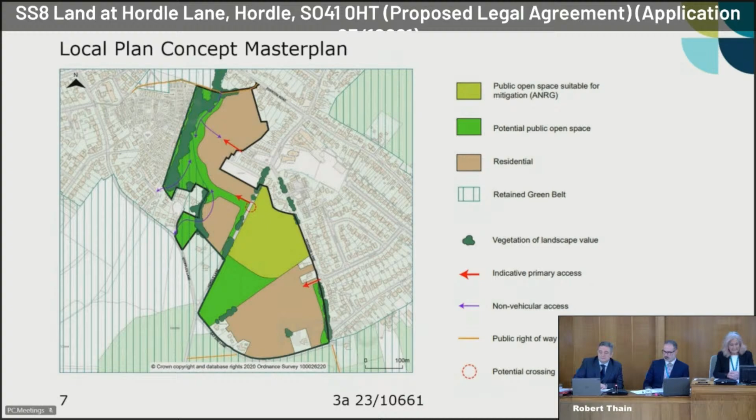The proposal is a hybrid application for the following: an outline planning application for development on land to the west of Hordle Lane, up to 155 dwellings, Class C3 use, including affordable housing, public open space and associated landscaping, surface water drainage and infrastructure works, with all matters reserved except for the vehicular access into Hordle Lane. The proposed housing comprises 60% market dwellings, so up to 93 dwellings, and up to 40%, up to 62 affordable dwellings.

There is also a full application on the land to the east of Hordle Lane for public open space comprising alternative natural recreational green space, pedestrian and vehicular access, allotments, surface water drainage and car parking.

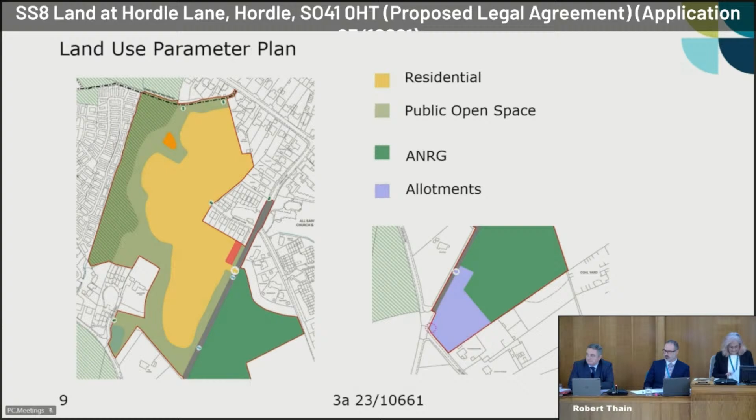The application is supported by three parameter plans, arguably the key one being the land use parameter plan. The proposed residential development within this scheme, up to 155 units, would be located entirely to the west of Hordle Lane in line with this parameter plan. This is broadly in accordance with the concept master plan, which sought to locate housing in this area.

The existing vegetation to the west of the housing would be retained and formed as part of the proposed public open space offer. To the east of Hordle Lane, you have the proposed ANRG, which supports the development, comprising 3.26 hectares of publicly accessible open space. To the south of that would be an area of allotments as indicated by the purple shaded area.

You also note in the land use parameter plan the main points of access, the yellow arrow on Hordle Lane, and the pedestrian crossings, of which there are two on Hordle Lane: one closely sited to the vehicular access, and another closely sited to the south at the edge of the housing scheme. There are also accesses indicated from Sydney Street, to the southwest of the application site off Stopples Lane.

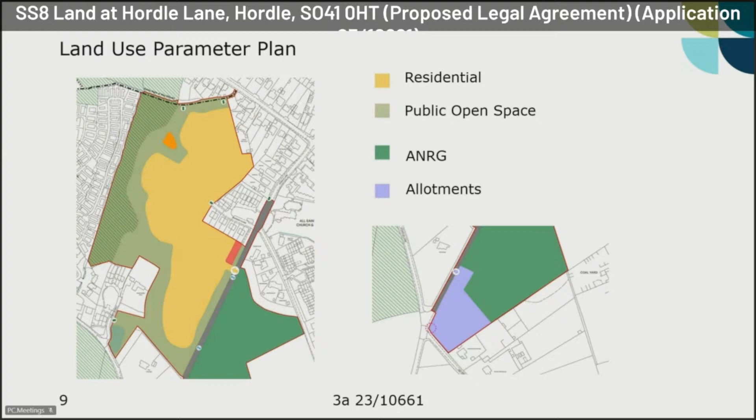Moving on to the green infrastructure parameter plan, this sets out the extent of open space and vegetation within the site, which is extensive. The public open space, informal open space adjacent to the housing, includes play areas, drainage features, pedestrian and cycle links including down to Sydney Street, landscaping, and retained vegetation. The majority of vegetation is proposed to be retained and managed over the long term.

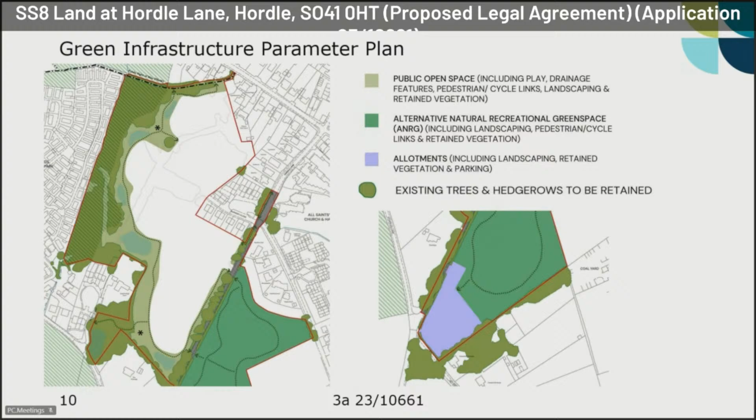On the eastern side of Hordle Lane, we have the alternative natural recreational green space, ANRG, which will include landscaping, pedestrian access, and retained vegetation. I'll come back to that later. There are also allotments to the south of the ANRG.

The third parameter plan is the building heights parameter plan, which subdivides the proposed building housing area into two. The periphery of that area would be up to two-storey development, and the centre of the site would be up to 2.5-storey development, up to 11 metres ridgeline height. Officers are minded, as set out in the committee report, that this is in line with the specific criteria within the spatial policy for SS8, which sought some higher density development within the centre of this building parcel.

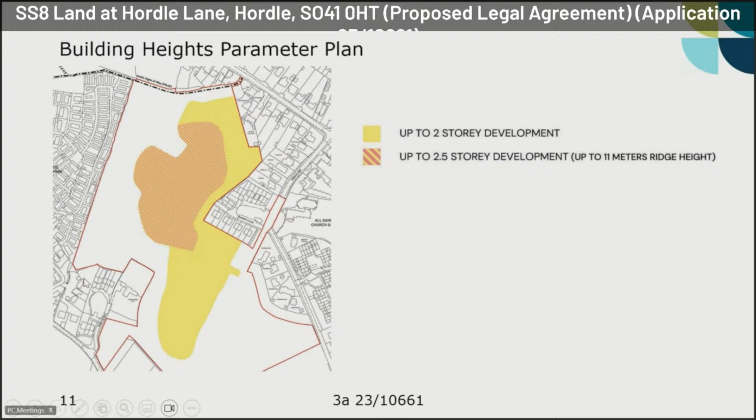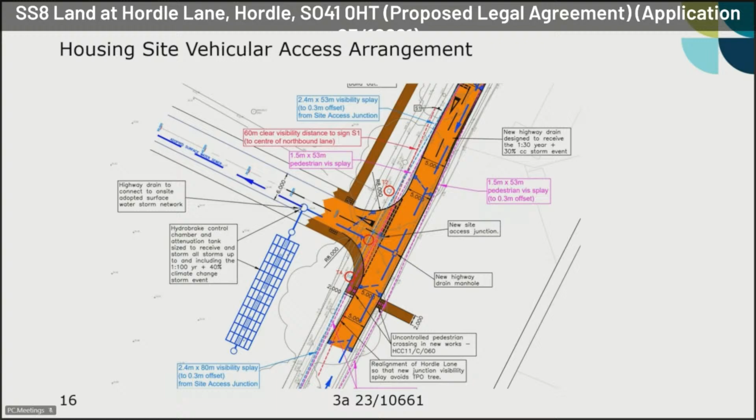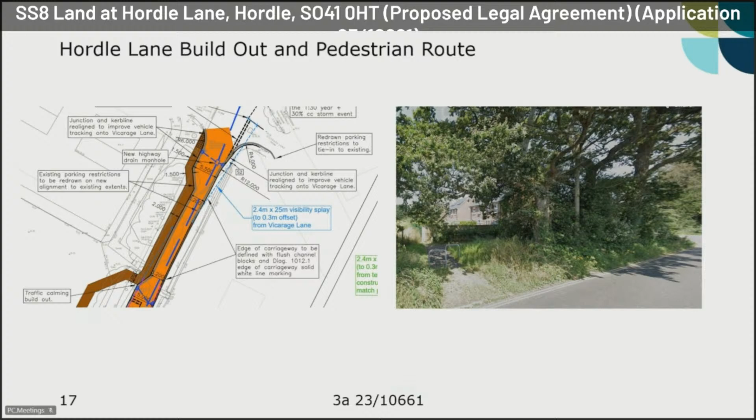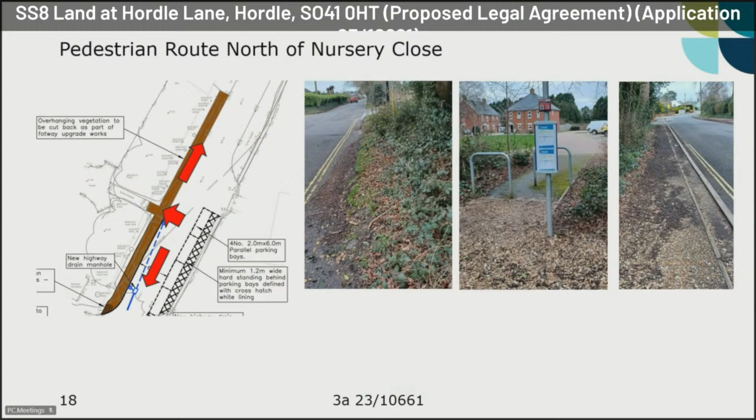The intention is to provide an upgrade to the pedestrian routes, and that would include improvements in surfacing, away from what at the moment partly comprises loose gravel, as can be seen.

As part of the need for highway safety, we have a need to regularise the parking outside the parish church, and the solution agreed with the applicants and County Highways is to form four parallel spaces, as set out in the diagram on the left-hand side. There will be four 2 by 6 metre parallel parking bays, and also a 1.2 metre wide hard standing behind the bays to facilitate safe access into any parked vehicles.

At the moment, the parking outside the church is not formalised, and there would be a reduction of about three spaces generally, where in that particular instance the car was parked parallel in line with the suggested solution, but sometimes people park face-on towards the hedging.

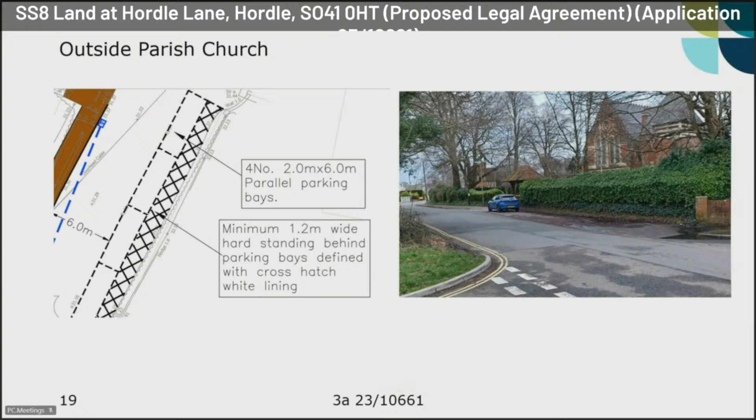The last part of the highways element is to indicate the public right of way north of the site. This is an existing public right of way which this scheme would connect into, providing a link from Everton Road through to the western portion of Hordle, including where the village shops are. There is a small contribution sought towards the upgrade of that public right of way. The area between the application site and Everton Road is currently unmade loose gravel, so it will seek to improve that with a proper tarmac surface as per the rest of that route.

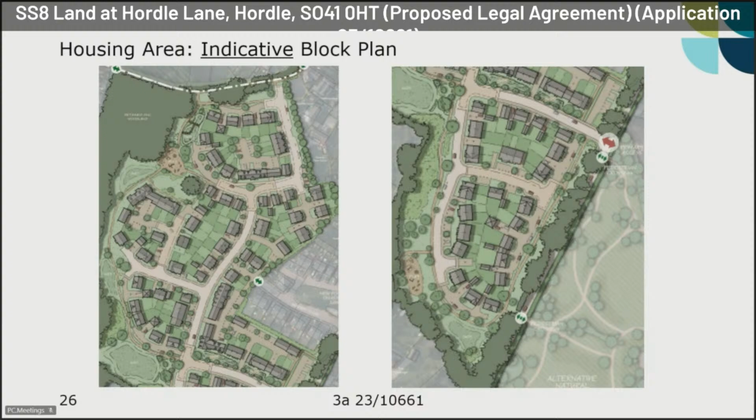Going back to the ANRG, I think it's fair to say that the land the ANRG is sited upon has some advantages. It's flat and it's open, it's got good surveillance, and having worked with officers both in the development management team and the environmental design team, we think this is a good ANRG in terms of open spaces. It provides necessary space for dog walkers, good areas for youngsters to play, and suitable walks for those without children or dogs.

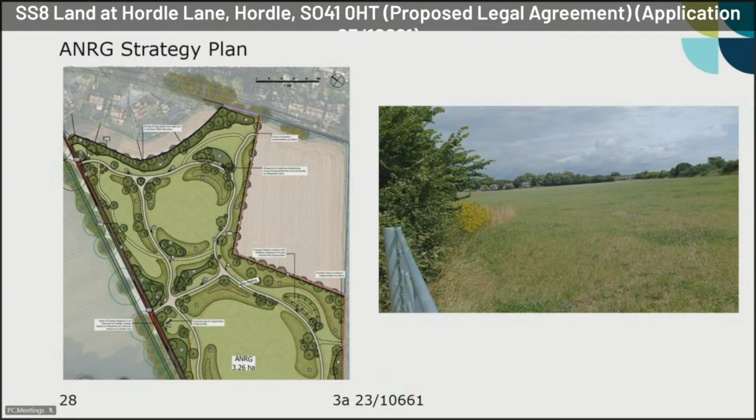Now, to the south of the ANRG we have an area of allotments with 15 different plots. 10 of those plots replace an area of land indicated for allotments which is included within the application site south of Nursery Close, and there are 5 additional plots on top of that. There's also a small area of parking proposed for allotment users, which would comprise a new vehicular access off of Hordle Lane.

The photograph on the right shows the existing 5-bar gate there. We'll be working with the applicants through the conditions to remove the 5-bar gate and improve that through the introduction of new hedgerows, and hopefully this will minimise any visual intrusion of the infrastructure associated with the allotments at that point.

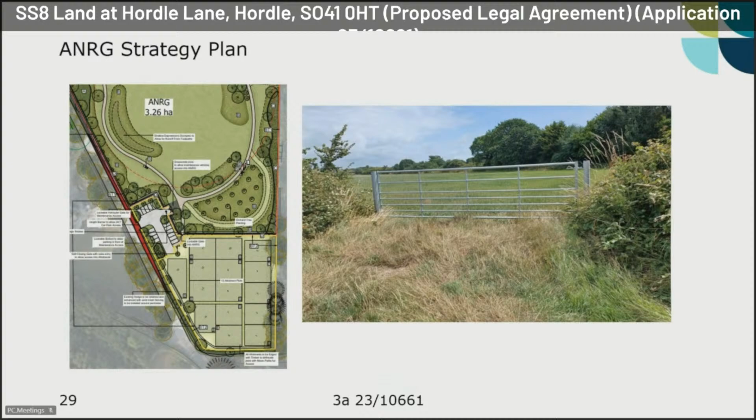Moving on to flood risk and surface water drainage, we've agreed with Hampshire County Council colleagues as the lead local flood authority a surface water drainage strategy within the housing area on the left. That will comprise a series of swales and basins that will eventually drain into the existing stream that goes through the middle of the protected woodland to the west, in the area between this housing site and the Park Home area.

And then on the right-hand side, we've got a surface water drainage scheme for the allotments area as well, and that will drain into the basins within the ANRG. We felt that was necessary as the land the allotments are sited on has had some examples of ponding and can be damp, so it will need its own drainage scheme as well.

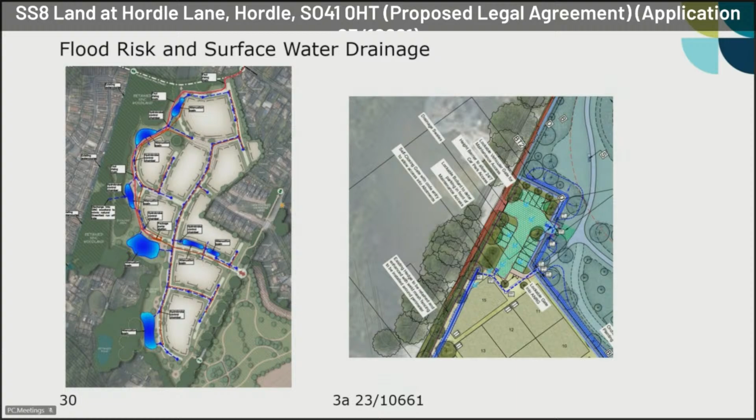Okay, so in summary, the proposal would provide 97% of the minimum quantum of housing identified in local plan policy SS8. That minimum quantum is 160, and we have up to 155 on the table here. Therefore, the proposal would make a significant contribution to the district's housing need.

The development will deliver up to 62 affordable dwellings, depending on the final total number to be determined through a reserved matters application, across a range of tenures - social rent, affordable rent, and shared ownership. So the affordable housing offer that the applicants are proposing is in line with our affordable housing policy and the tenure split set out within that.

Given the proposed housing, the balance is clearly in favour of permission and will meet the priority of meeting housing needs set out in the recently adopted NFDC corporate plan. No substantive alternative evidence has been submitted in representation to set aside the views of statutory consultees.

The proposal, subject to a Section 106 planning obligation and suitable conditions, will be acceptable in terms of highways, access, public right-of-way, flood risk, surface water drainage, and foul drainage. The representations from the Parish Council and local communities on highways are fully noted, but in line with the representations from the local highway authority, subject to a Section 106 planning obligation and suitable conditions, the proposal is suitably mitigated for development.

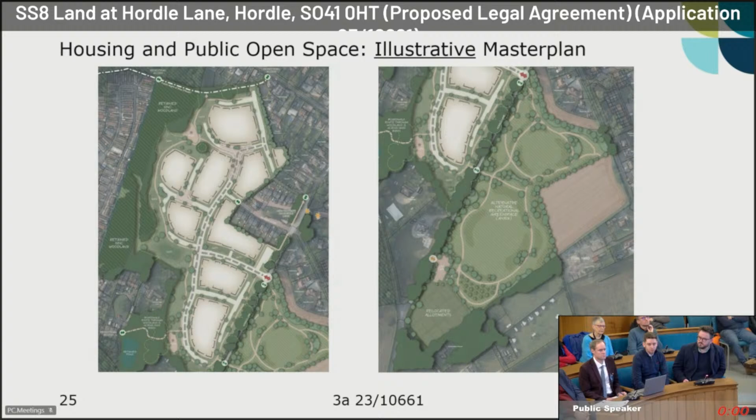Yes, we've had discussion on that with New Forest and Hampshire. I think there's obviously an element of, yes, whilst it might open it up to the wider population, there's also an element of putting pedestrians onto an uncontrolled road, and the issues around everything discussed now about people walking along Hordle Lane. So in discussion with those officers, it was deemed that it wasn't something we wanted to provide within the application because of those reasons.

I think, as Robert's outlined, there is a lot of connectivity to the site and the scheme, and with the future area of ANRG, there's potentially an opportunity to review it at that stage. But within this application, it was just determined to present it as shown.

So you're saying that's something that might well be reviewed at a later stage? Yeah, I mean us as Bargate wouldn't be involved in any future application because we don't control the other housing elements to the south, but there are contracts we're involved in. That's where, should it become future ANRG, we essentially hand that land over, and it'd be for those applicants to decide on access, with an opportunity to review that. But as part of this scheme, we're not looking to provide it.

But as Robert noted, there are two future connections, one into that portion of retained land, and also one on the eastern boundary, so that future residents can access that when that future application comes in. Thank you.

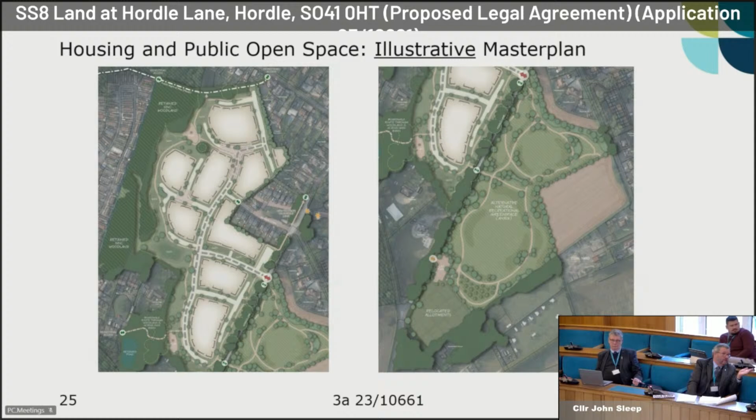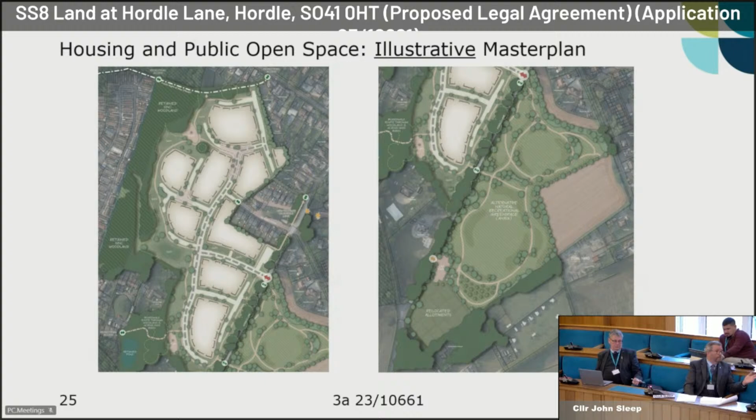One of your statements was that the parish comments have been fully noted. I notice we've got highways here, which is rare for us, because on these plans we always have problems with access roads, small streets, little lanes. It's always a nightmare, but highways tell us it's okay, they've checked it, so we pass it because we have to take their word for it. We've got strong support from the parish on this. I want reassurance that all the concerns they've brought forward have been fully noted, and if not, will they be developed further in the next section of planning for the housing?

Both myself and Mark and everybody in his team are always happy to meet the parishes if they approach us. I don't believe that's specifically happened in this application, although I've had various conversations with the parish clerk, who isn't here today, and the last conversation I had was for over an hour before Christmas. In terms of noting the parish comments specifically on highways, these have been acknowledged by my colleagues from County Highways and taken into account in their professional opinion, which has been set out.

Are there any more questions? Councillor Riley: it says here the parish council will only accept the management of the allotments if they were transferred to the parish in perpetuity. Is that a possibility, or could that happen?

The current intention is to open up a dialogue after this committee with the parish to see if they wish to take on in perpetuity stewardship of those allotments. That ball is in their court as to whether or not they wish to do it. If those allotments weren't taken on by the parish, they would be incorporated within the management company, which will manage the other open spaces within the whole application site—for example, the ANRG to the north, and the other public open space. They'll be subject to a management company regime, as we've done on most of the other strategic site allocations. But we'll happily discuss that with the parish to see if they wish to take it on or not. Essentially it's their choice, but the offer's there if they want it.

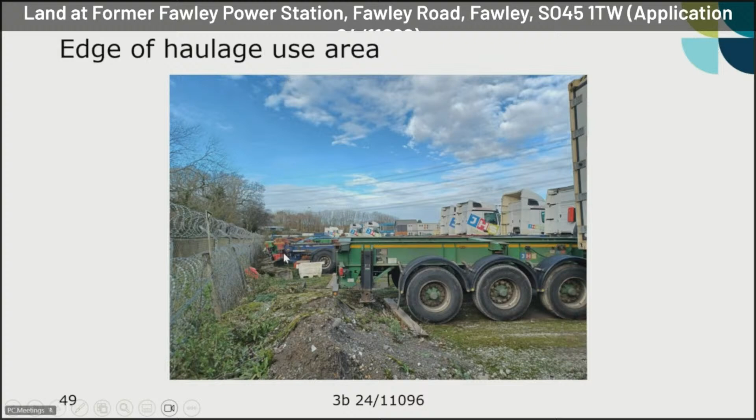Then this next photograph is showing the central haulage use area occupied by JHS. You'll note their vehicles here parked and stored on the land. And then here we have a photo of the western edge of the haulage use area. You can see the wire fence boundary here with woodland beyond. Then here we've got another image of the haulage use area, looking southwards. In the distance, you can see the electricity substation building and some stored wind turbine blades as well there.

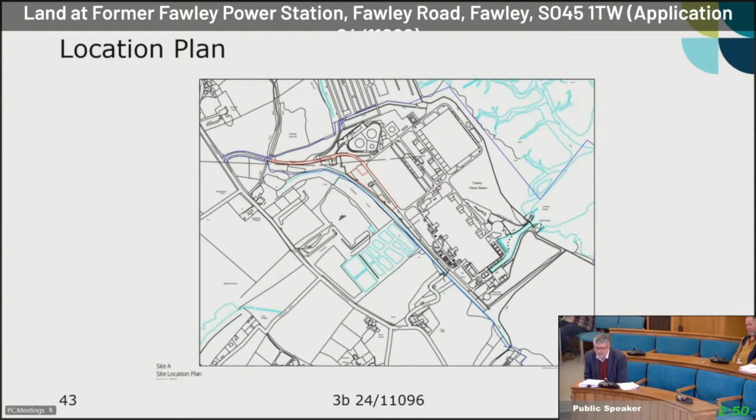Thank you for the opportunity to speak. My name is Ian Monachino Ayres. I'm a director of IMA Transport Planning, speaking on behalf of the applicant. We prepared this transport statement that was submitted in support of both the temporary applications, sites A and B.

The approach to assessing the impact of the proposal was slightly unusual in that the applications are retrospective, and hence the site is already being used for the planning permission sought. This means our approach was to survey traffic movements both on the site access and on the B3053 to the north of the site access to establish how much traffic the whole site was generating and its proportion of traffic on the B3053. We then, based on the development areas, estimated how much of this traffic was due to the areas for which planning permission was sought, which allows us to assess the impact of the proposed development areas on the highway network. The conclusion of our assessment was that the impact of the use of the areas for which permission is sought is negligible and would have no material effect on the operation of the highway network.

Hampshire County Council, as highway authority, has considered our assessment and concluded there is no highway objection to the proposed development. I've also been asked by my client to address the recent representations made by Mr. Allen, a local resident, regarding the logging of movements by container vehicles over the weekend. They would like to advise the committee as follows.

Regarding the current hours of operation undertaken by JHS, we fully acknowledge that these are incompatible with the proposed hours of use condition. If planning permission is granted, JHS would therefore be unable to continue operating in their current manner from the site. In reality, this means they would probably end up having to vacate the site. There are breaks in the lease agreement with JHS which would allow us to terminate the lease in such circumstances.

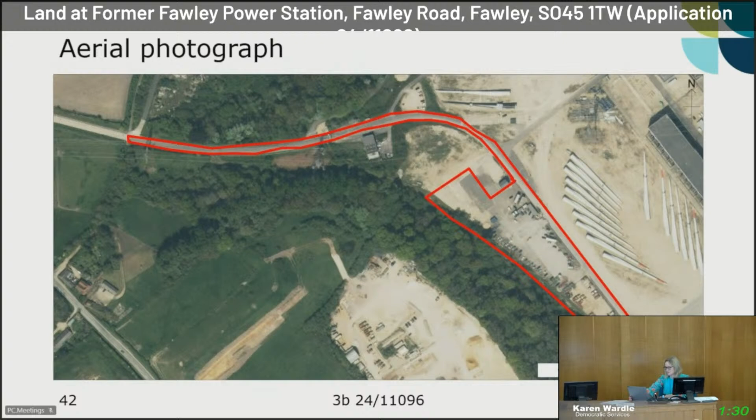The major problem for residents is the increased noise from traffic, particularly on the B3053. It is accepted by both the planning officer and the environmental health officer that this noise negatively impacts the community. The various traffic reports are difficult to compare, but another issue is the increase in traffic since 2019, which the road movements planned under the original scheme and agreed with Hampshire County Council were meant to address.

If these two applications are accepted with the condition that the work can continue until the end of this year, it will mean these unapproved activities will have continued for well over 2 years. I think this is unacceptable, and I believe it is a mockery of due process and the rights of the community not to be negatively impacted, which are enshrined in planning law. I ask this committee to take action to stop the use of the site for these purposes as soon as possible.

Thank you. We did have a declaration of interest. Was it Councillor Hartman? Yeah, if that's recorded. Thank you.

Okay, questions then, please, either to officers or speakers. Councillor Wade. Yes, Chairman, I've got a question for our planning officer.

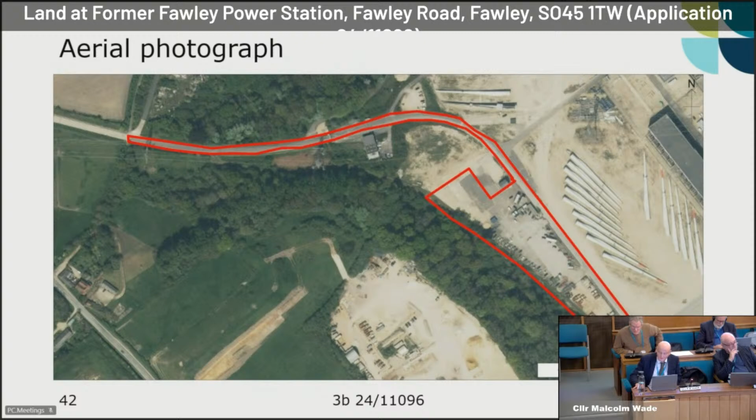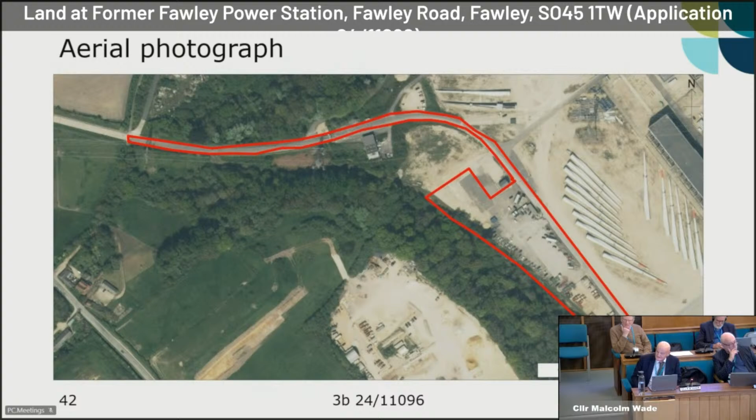A haulage company requires an operating licence legally to exist and to operate. Part of the operating licence has to designate its operating base, it's got to be on their licence, that's a legal requirement. Now this is retrospective planning permission, but to get an operator's licence and an operating centre, you have to have planning permission. So the question I want to ask our officers is, are we about to ratify something that is illegal? Because if you have to have planning permission to have an operating centre, the operating centre has to be on the operator's licence.

This is true, because I've just checked it myself while we were going through this. How can we ratify something that isn't correct legally?

I'm not sure that I can fully answer the points, but what I can tell you, based on the application submissions, is that the agent for the application has confirmed that JHS do have the necessary operator's licence. In terms of the planning consideration, that really isn't something we consider in terms of whether we recommend temporary permission or not. Obviously, if temporary permission is granted, then the uses on that site would be lawful for the duration of the rest of this year, but they would need to operate in accordance with the conditions of the temporary permission.

Can I just come back to that? I understand what you've just said, but if it's illegal in the first place because it hasn't got planning permission, is it right that we're going to ratify something that was originally illegal? Perhaps our legal officer will add.

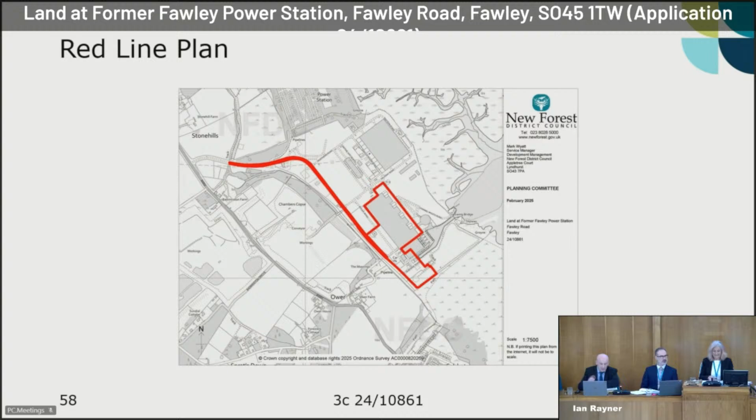The application has been submitted retrospectively, with temporary planning permission being sought until the end of this calendar year. In terms of context, you can see again the site is served by the long access road that comes in from the west, from the B3053. The land in question lies immediately adjacent to the New Forest National Park on its western and southern sides, with there being a public footpath that runs fairly close to the site's southern boundary.

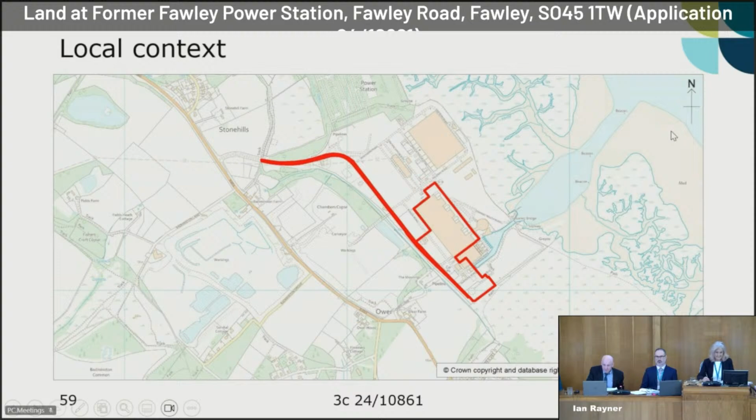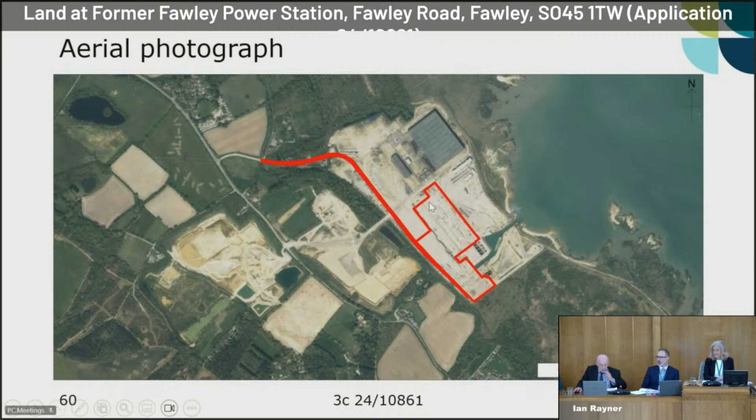This aerial photograph gives you further context. Again, you'll see the long access road coming in. The site itself is laid to hard standing and the ground level areas are flat, but as you will see from the photographs that I'll show you, the large basement of the now demolished turbine hall extends several metres below adjacent ground levels. You can see that the adjacent areas of the former power station site are being used for the storage of wind turbine blades. You'll note again the site's proximity to Southampton water and protected coastal habitats, whilst to the west of the site, you'll note the active quarry workings within the national park.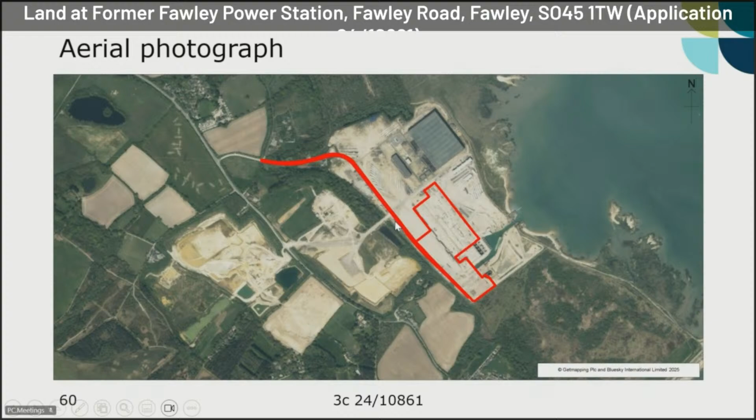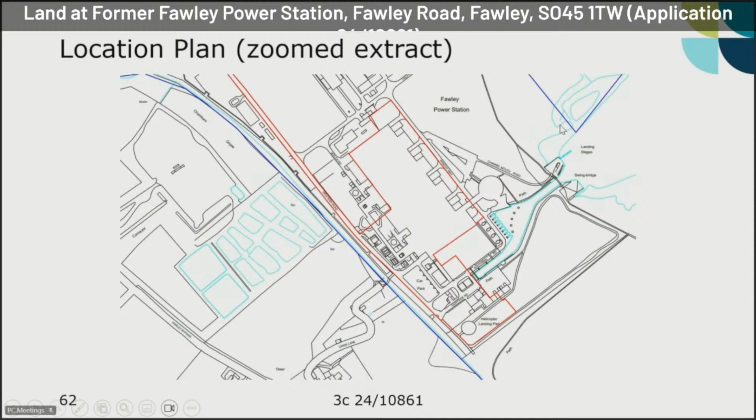I'll just take you quickly through the submitted application plans. This is the site location plan, and then a slightly more zoomed in version of that location plan. Just to note, many of the structures shown on this plan are now demolished. And then this is the applicant's submitted block plan. This area is the basement, the turbine hall basement area.

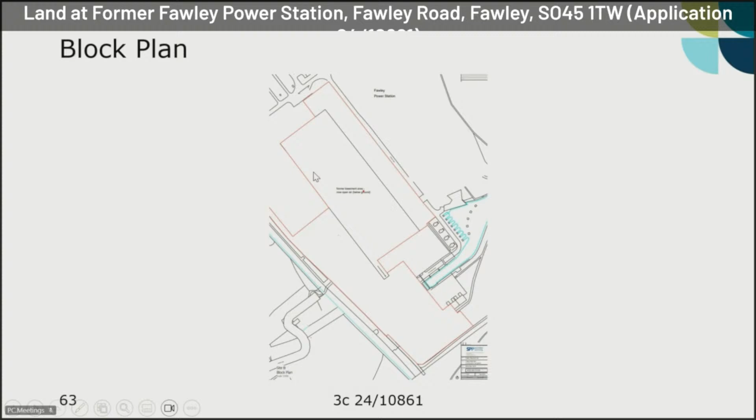Now at present, the site is occupied by two different uses. The main user is SJG, a local company based in Marchwood, who import vans from China. Vans are brought into the site on containers before being stored on the ground level areas of the site until they are sold, at which point they are driven away. Some of the empty containers are then stored in the basement until being sold on. The second user, Snoozebox, have been renting the northwestern corner of the basement area since September 2023, where they store containers used as mobile accommodation units for large construction projects and events. Since the main delivery of their containers to the site, their use of the site has been very low key.

So to show you some photographs so you get a clearer understanding of the site in its context, here we're looking from the south into the old turbine hall basement. You can get an idea of how deep the basement is. You'll note the containers being stored within the basement by SJG, and on the left-hand side of the image you'll note some of the vans being stored on the ground level areas outside of the basement. This image again shows more clearly the vans stored within the ground level areas above the basement, and here you can see the sloping access into the basement from ground level.

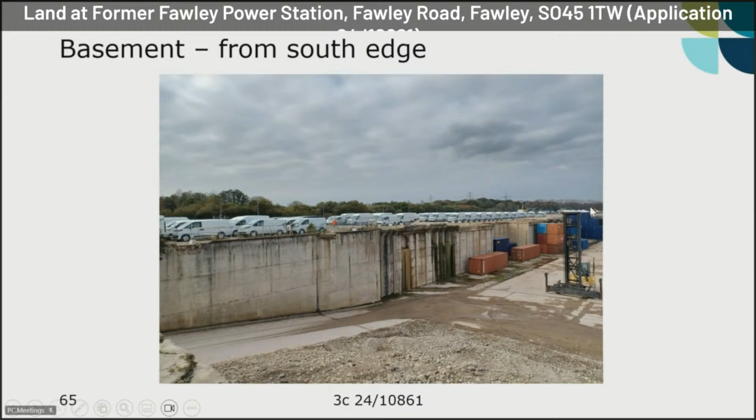Then here we've moved to the north side of the turbine hall basement. We're looking into the basement clearly. You can see here some of the more recently delivered containers which the vans are brought in, typically two vans within each container. Further back you can see the containers being stored, stacked up to 5 containers high, but they only project above the walls of the basement to a limited degree. Again, you'll notice the white van stored above the hall.

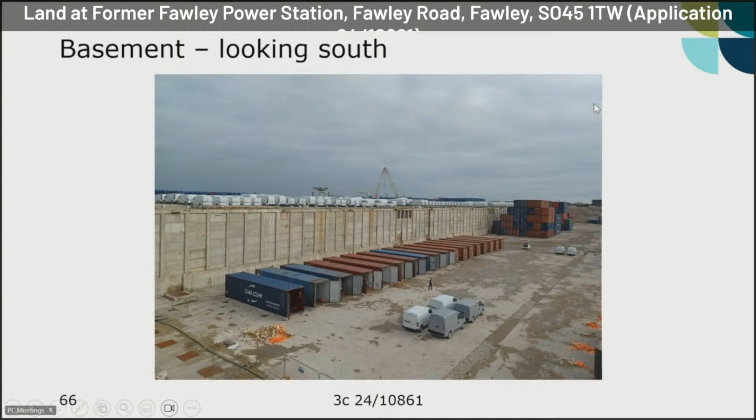Now here we're looking at the storage use by Snoozebox. These are all the double stacked white containers here. The storage here, as I've mentioned, is relatively static. And then here we're looking into the basement from the western side. Again, you can see the white containers stored by Snoozebox, and beyond you can see the different coloured containers being stored by SJG, and again you'll notice the stored vans in the distance.

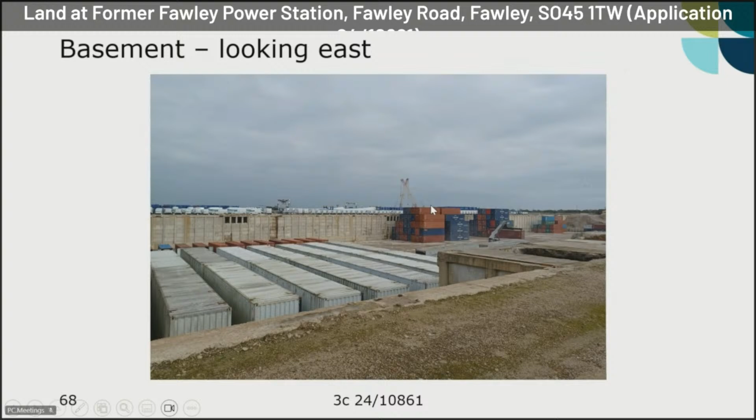So in terms of the ground level areas, just a couple of images here. This is on the east side of the turbine hall basement. Again, you see the line of stored vans. And then here we are down to the southern boundary of the site, adjacent to the National Park boundary. You can see the wire fence here, which marks the power station's boundary, beyond which is the National Park. One final photograph is this aerial perspective, which gives you a clear idea of all the activities at the former power station site. This is the turbine hall basement in the centre, and you can see the lines of parked vans on either side, and some of the other activities including the wind turbine storage.

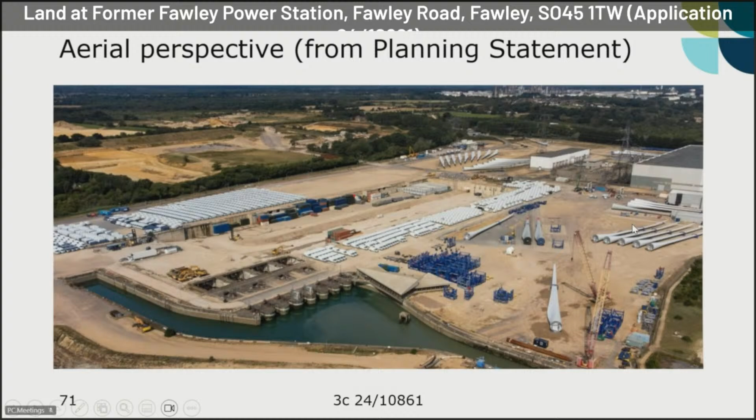As with the previous application, the permanent storage use would not accord with policy strategic site 4 of the local plan. Again, this is the concept master plan, and as I've said in the previous presentation, policy promotes this site for a residential-led mixed-use development of 1,380 houses, up to 10,000 square metres of ancillary community retail, leisure and service uses, and business uses, falling primarily within use classes B1 and B2 in the northern part of the site.

Following the withdrawal of the redevelopment proposals last year, in July, as with the previous proposals, it's considered that a short-term temporary employment use would be appropriate in principle and would deliver economic benefits in the short term, pending more permanent uses coming forward.

As with the previous application, the proposal still needs to be acceptable in itself and in accordance with policy ENV3 of the local plan. In this respect, there are 5 issues I will go through briefly, namely transportation impacts, amenity impacts, landscape impacts, ecological impacts, and in this case, flood risk.

With respect to transport impacts, you've heard the advice on the previous application. Both applications were supported by the same transport statement, which considers how much transport impact the uses generate. Details are set out in the committee report. In respect of this site, the storage use by Snoozebox is a low activity use generating few traffic movements.

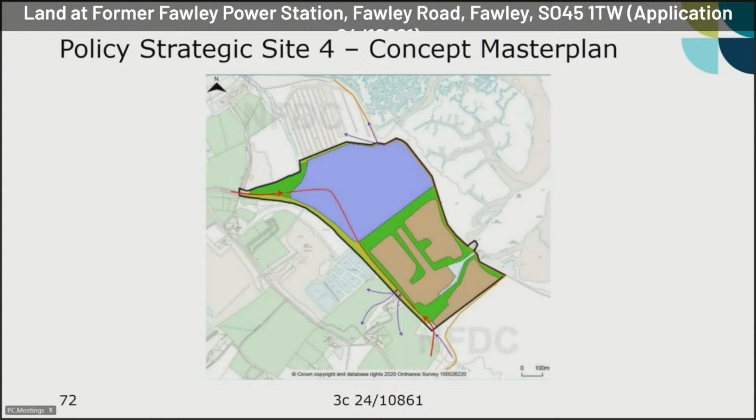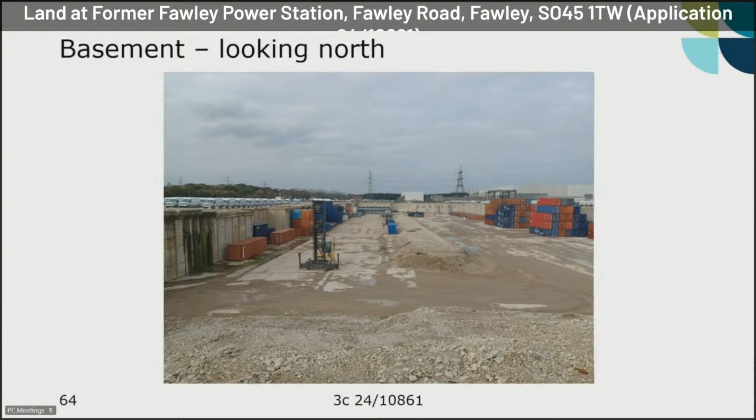Moving on to amenity impacts, the most significant noise impacts in this case are within the turbine hall basement area, which due to its depth is quite an effective noise buffer. It's important to note that SJG only typically operate on the site between 7 a.m. and 5 p.m. Mondays to Fridays and do not operate at weekends. Therefore, their use of the site should not be generating significant traffic movements beyond the site outside of these hours. The applicants have confirmed they're agreeable to accepting a condition that restricts hours of operation to these current working hours, and in this way officers are satisfied that the use would not be materially harmful to the amenities of nearby residential properties in Ower Lane or properties further afield close to the B3053.

In terms of landscape impacts, and in particular impacts on the adjacent New Forest National Park, the parked vans are visible from public viewpoints within the adjacent national park, but in the short term their visual impact and landscape impact is considered acceptable. However, even in the short term, it is recognised that container storage would have the potential to have a more harmful impact on the national park. As such, this plan has been submitted to label the areas where container storage occurs, to be conditioned.

The green area of this plan is the turbine hall basement, where stacked container storage is considered visually acceptable. The yellow area, adjacent to the more open parts of the adjacent national park, is where it is considered that no container storage should occur, whilst on the beige areas, single height container storage is deemed acceptable, and this is reflected in the conditions detailed within the committee report.

In terms of ecological impacts, a concern has been raised about the potential for bats to roost within some of the crevices of the turbine hall basement. On the basis that the application only seeks a short-term temporary planning permission, this impact is considered acceptable, subject to condition 6 as detailed in the committee report.

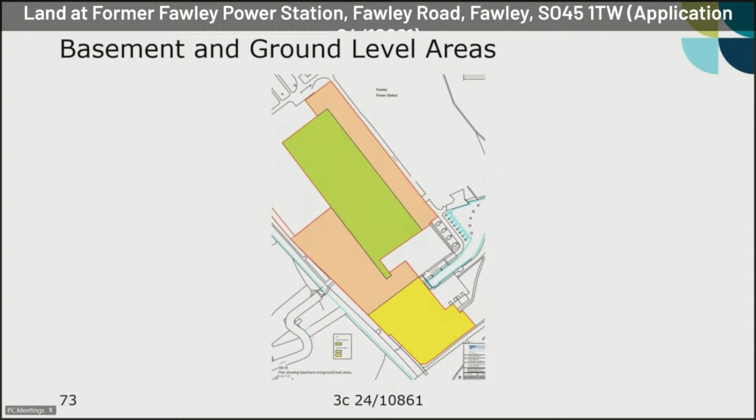Summing up, then, we have a proposal, as with the one you've just considered, that's contrary to local plan policy. However, officers consider that there is reasonable justification to permit the proposed temporary use until the end of this year, given the scheme's short-term economic benefits and given the proposal would not prejudice the long-term delivery of a sustainable and policy-compliant development in the longer term.

Officers are satisfied that the continued operation of the proposed use would not be materially harmful to highway safety, to residential amenities, to the special qualities of the adjacent New Forest National Park, or to ecological interests, or indeed harmful from a flood risk perspective, subject to conditions restricting hours of operation and the height and location of stored items. So the recommendation is to grant temporary planning permission, subject to conditions, until the end of this year.

Thank you. I don't think you need to read, Councillor Alves. You want to do it again? No, and you're happy not to say any more. So, questions - do you still have your question, Councillor Crozell?

Councillor Sleep: In Councillor Alves' defence, one part of his message stated that while we have these vehicles parked on site, there was no reason, according to ABP, why they couldn't have been parked in the docks. There was access available for them. I'd just like to make that point.

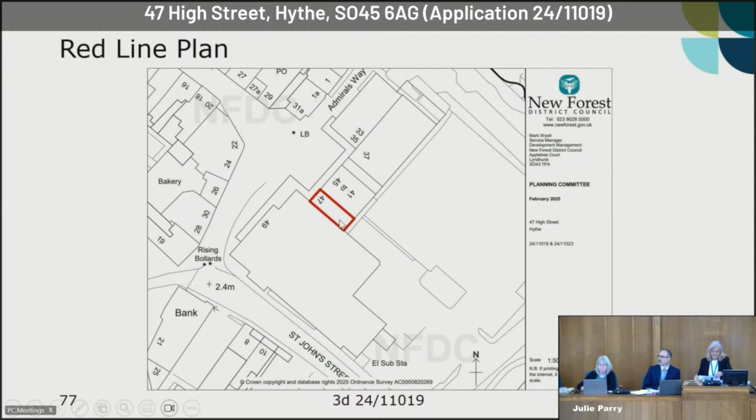Here we have the planning constraints. So all this in pink is the conservation area. It's quite a wide area which covers the High Street, the Marsh and St John's Street.

Highlighted here are some of the listed buildings. We've got number 23, currently used as a chip shop, the public house, another unit opposite, and round the corner into the Marsh, this big unit on the corner is also a listed building. So when considering this, we consider the impact on the conservation area and also the setting of these listed buildings. Local policies and government guidance are looking to preserve and enhance this historic character with any new development.

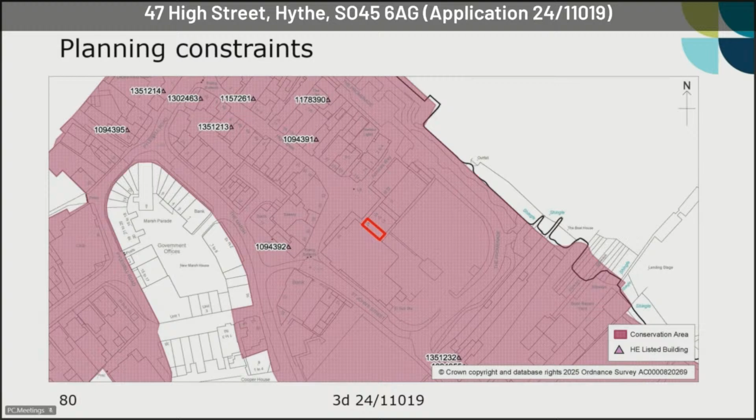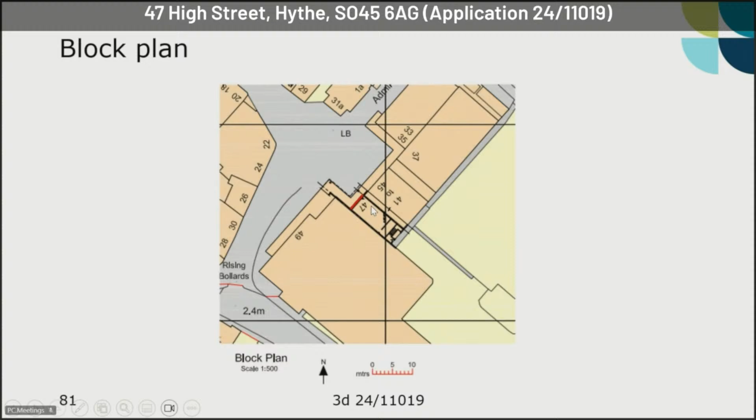So we have a block plan here produced from the agent showing the frontage of the shop highlighted in red, which is where the signage is at this stage. You can see the signage here above the shop, and we've got the shuttering underneath. That isn't considered under this advertisement consent - that would be under the next application. So this application, we're just dealing with the Hythe Barber Shop sign here, which is internally illuminated. It's a metal box sign, and each letter is obviously illuminated individually.

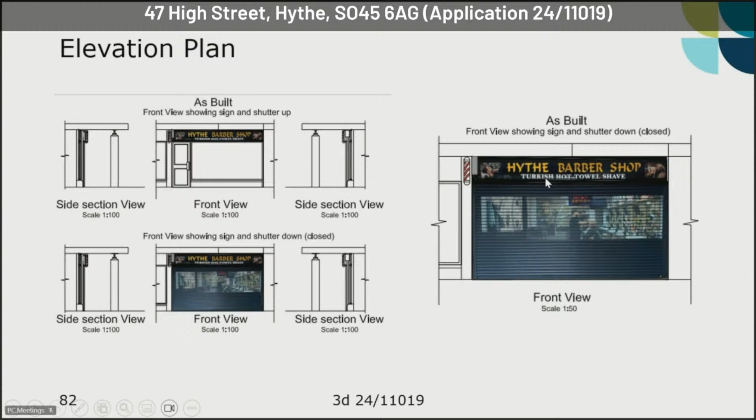And here's the elevation plan showing the protrusion to the front of the security shutters and the sign.

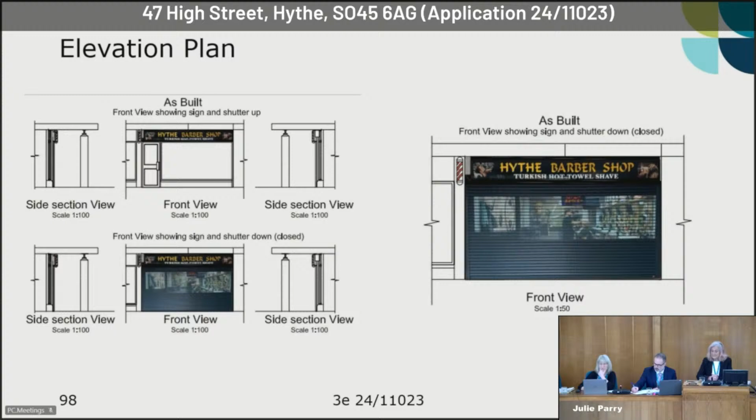So I just want to go through the photographs of the shutters when they're closed. Basically it's a corner position and it does give a semi-industrial appearance, which is out of keeping in this location, these metal shutters in black. It is contrary to the shopfront design guide, which states that gaunt and unattractive shuttering could create a hostile environment if replicated, and it obscures views into the shops, giving a blank frontage, which gives a loss of vitality and traditional character of the area.

So again, the recommendation is to refuse the shuttering because it's unsympathetic to its environment, the street scene, conservation area, etc. as before. Thank you.

Thank you, are there any more questions? Councillor Sleep: Can I just ask the officer, if the elevated box, the 500 deep box on the top, are we looking at the blind actually installed in that as well? Yes. So the box, we get rid of the box, the blind's got to go. Both go really. Okay, thank you.

Councillor Cresswell asked if this means shops can't have shutters even if subject to vandalism. It was explained they would need consent for shutters, and such shutters would reduce the vitality of the conservation area, though internal alterations might not require consent.

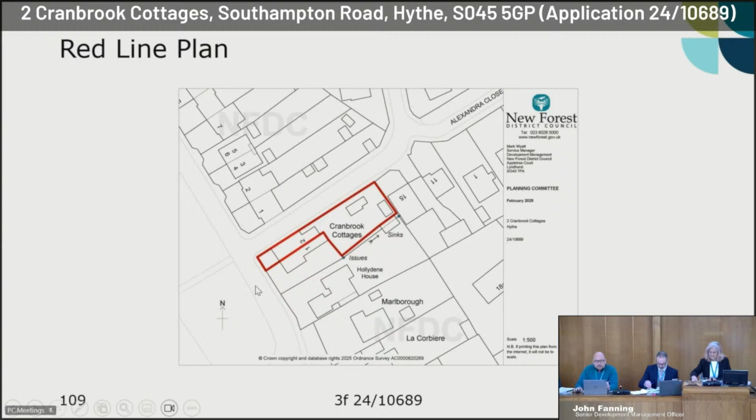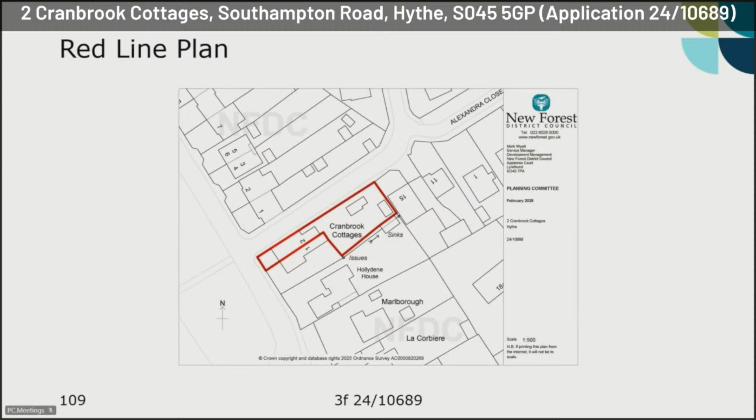The officer presented the application for a new dwelling in the back garden of the existing property at 2 Cranbrook Cottages, wrapping around the rear of the conjoined property at 1 Cranbrook Cottages. The site is off the main Southampton Road thoroughfare, set back by green space, accessed via a road leading into Alexandra Road and Alexandra Close.

The officer noted they wanted to discuss the layout of the area and flag a few points for attention, highlighting that properties here are set back from the building line.

There's also quite a spacious character in terms of sight lines - the fence drops down here, so you've got sights across these rear gardens. We'll look at some site photos later, but there's an existing access here, which provides access to a couple of different outbuildings in this existing open garden area.

While I've got this slide up, I'll talk about one of the key issues on the scheme, which is that there's a culverted river running in proximity to the site, resulting in this strip being designated as flood zone 3. As laid out in the report, flood zone 3 is split into two categories, 3A and 3B. For the reasons outlined in the report, we've taken the position that we're currently designating this site as flood zone 3B, the highest rating of potential flood zone risk.

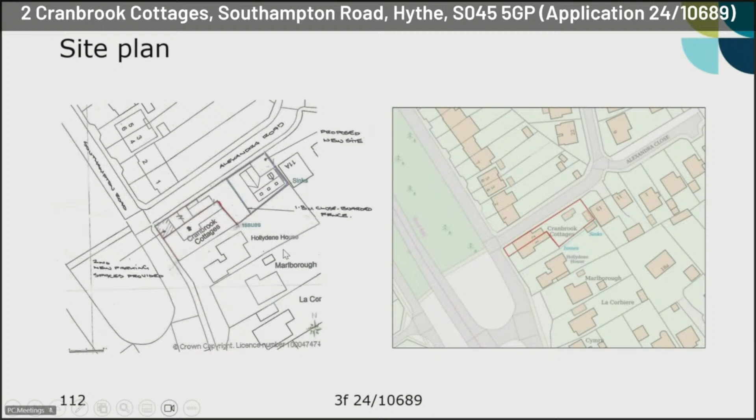So in terms of the actual proposed development, we are looking to fit in a bungalow, a single-storey property, with a garden running to the side of the property. You can see the relationship with the dwelling to the rear there, and then it projects forward to the front of the site. You can see those existing outbuildings here, which we've got site photos of in a few seconds. And this is the proposed layout.

In addition to the potential concern about the flood zones, we also had some concerns about the potential layout of the development and how it integrates with the surrounding character and appearance of the area. As you would have seen from the high-level photos earlier, there was quite a substantial setback characteristic of this area, and also quite large gardens generally. The concern was that the infill development here felt quite cramped in the plot.

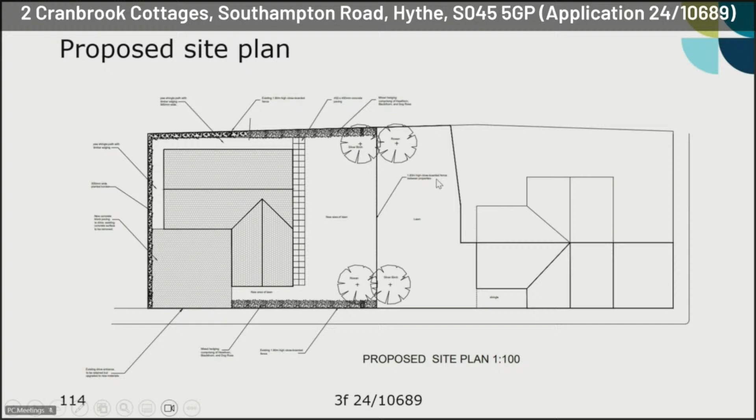We'll look at the elevations in a second and you can see how that would look in the street scene - that's to give you an idea of the layout and subdivision of the existing plot and how that would work. So this is the front of the property, the one on the left, that's what you would see walking down the street scene. This is how the property would look fronting onto the open space area to the side, the garden, and this is how it would look from the other elevations.

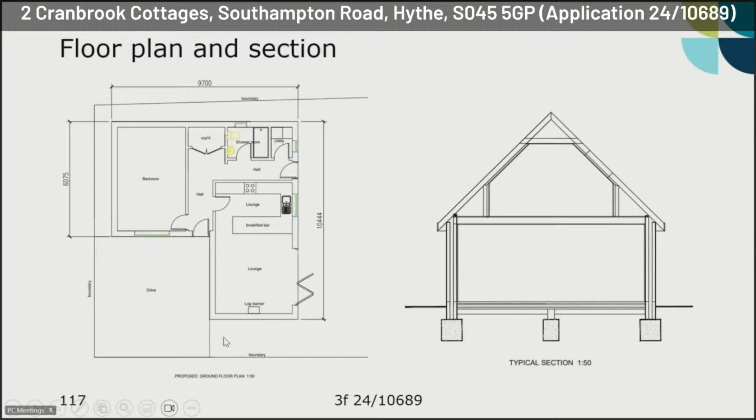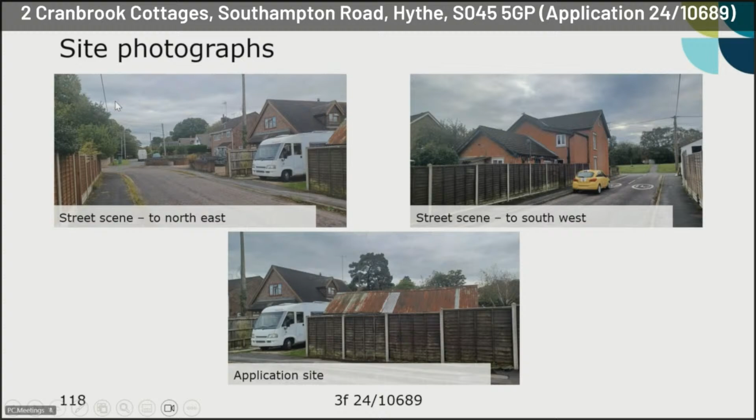This is just the internal floor plan. Concern was also raised by one of the neighbouring properties - this property here. They have two side-facing windows, one visible from the dormer window and one at ground floor level. Both of those windows are bathroom windows, so our assessment was that relationship wasn't harmful, although we retained concerns about the visual characteristics and appearance of the street scene. This is the existing property, looking down into Alexandra Road and Alexandra Close, and this is the look into that property, showing the additional side ground floor window.

So for the reasons we've laid out, there are three key issues. The first is the flood risk - we don't think a new residential property is appropriate in an area of flood risk. The second is concerns about the character and appearance of the surrounding area - we feel the development represents a cramped form of development that doesn't reflect the existing pattern of the street scene. And the final issue is a noted impact on sensitive habitats within the wider New Forest and Solent area from new residential accommodation.

So a mitigation requirement would be required, which would be resolved by a legal agreement, which hasn't currently been provided. So for these three reasons, we are recommending that the application be refused.

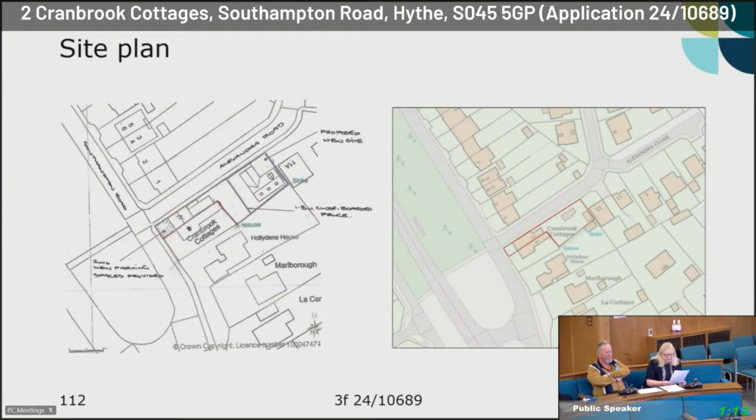Once this flood concern was resolved, pre-planning permission was requested from New Forest District Council, with very little response other than rejection, with communications about properties within Southampton City, not Southampton Road, Hythe, regarding flood risk properties. In a bid to move this forward, after several months, we decided to implement a full planning application.

This was submitted in August 2024, and after providing all the requested documents, this was accepted on the planning portal application in September 24, with consultation closing at the beginning of November 2024. The consultation expired at the beginning of November and no issues were identified.

After the consultation expired, there were several additional submissions, including letters of refusal from Malcolm Wade and others, despite discussions with no objections from our neighbours. An objection was submitted after this person left the country, submitted on her behalf by her daughter.

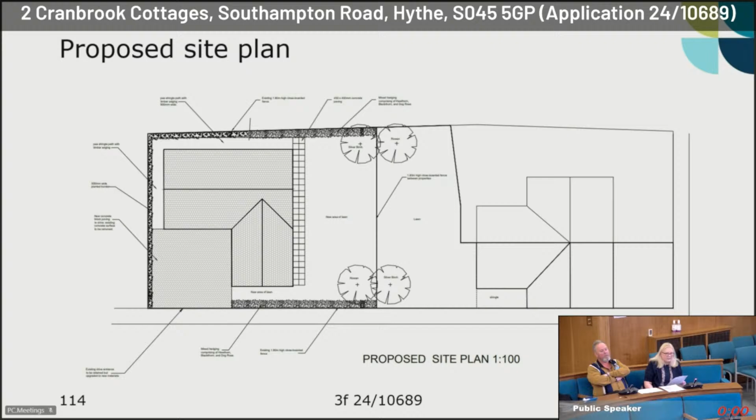We addressed the comments and statements of all interested parties and completed a flood risk assessment, and implemented changes to the building specifications. Regarding the concerns of not being in keeping with the surrounding location, a review of all the houses identified that the only constant thing is the inconsistency of properties around this location.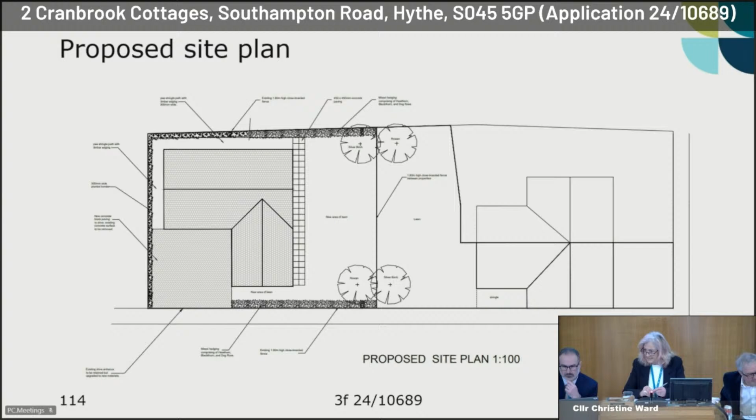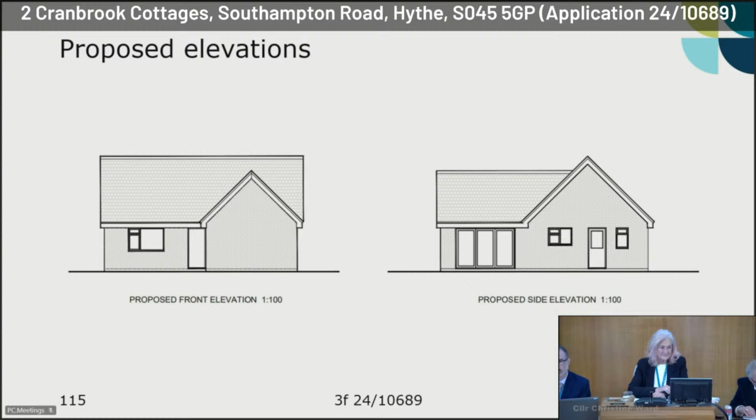I do apologise, I didn't quite catch that. I'm Malcolm Wade, you did quote me - could you just repeat what I said or done, please? Because I didn't... we actually put something on the portal about it not being in keeping with the surrounding areas, and that the houses were - I think that was Alex, yeah, Alex - and that the garden would be too small. That was Alex Wade, not me. I'm sorry.

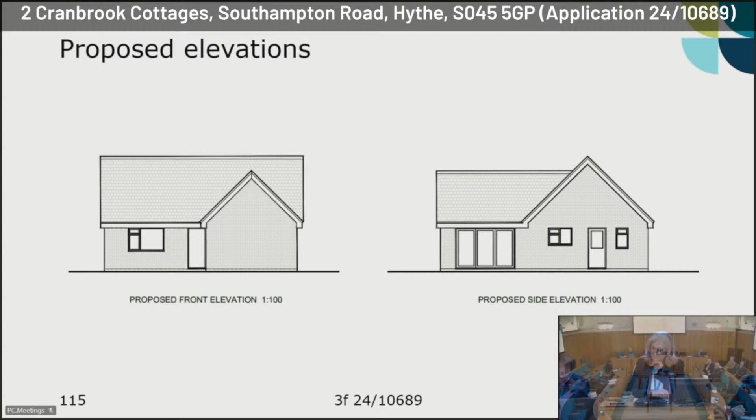So it's through that - what is it, a 12-inch pipe or something buried underneath it? I don't know the specifics, is the short answer. But you've listed it as a culvert and as a flood risk, okay.

Councillor Wade: What it is, that culvert that is running takes all the highway runoff water from the top of Hythe, because that's obviously higher, and it goes down one central culvert that goes all the way down to the promenade, where there is a double valve to let water out but not let water in, and it's the main drainage point for the whole area.

Any more questions? Then we'll go into debate. Does anybody have anything to say?

Councillor Riley: Well, I think it's overdevelopment again, isn't it? It's a pretty small site for two houses. And I've got concerns with the culvert as well, so I won't be supporting it.

Thank you. Councillor Hawkins: Yes, it's typical backland development as far as I'm concerned, and I think if we start to build in our gardens, we're going to take away all the greenery, and it shouldn't be allowed.

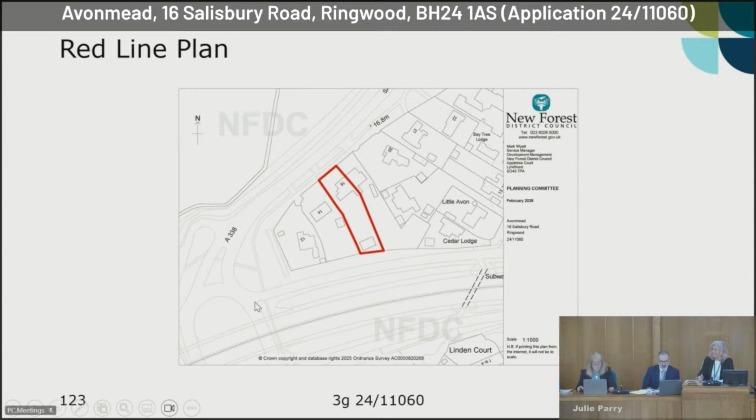Good morning or afternoon. So this application is in Ringwood. You can see here by the site location plan that it's off of the roundabout and on the road that leads to Fordingbridge. This road here is the A31 slip road. The property is 16 Salisbury Road. It forms part of a semi-detached property with a long garden and an existing garage to the rear. This part of the plan is full of trees. I would imagine that is to soften the blow of the slip road to the rear.

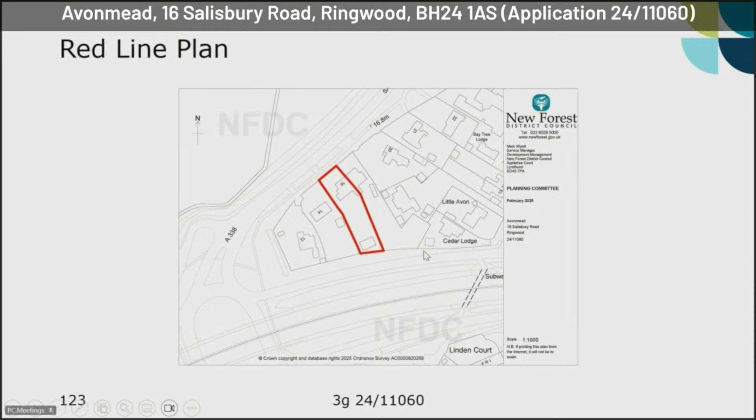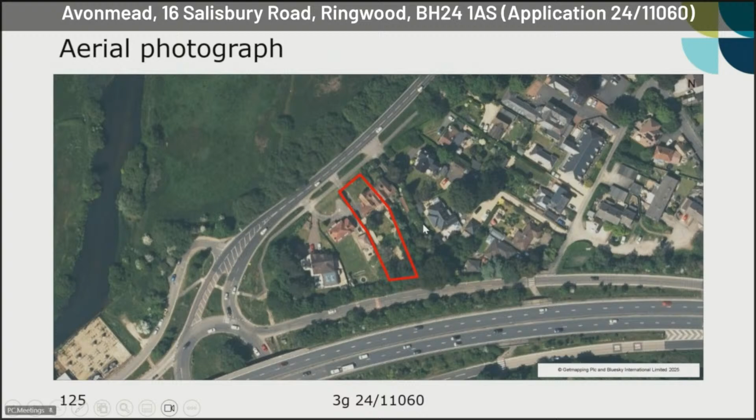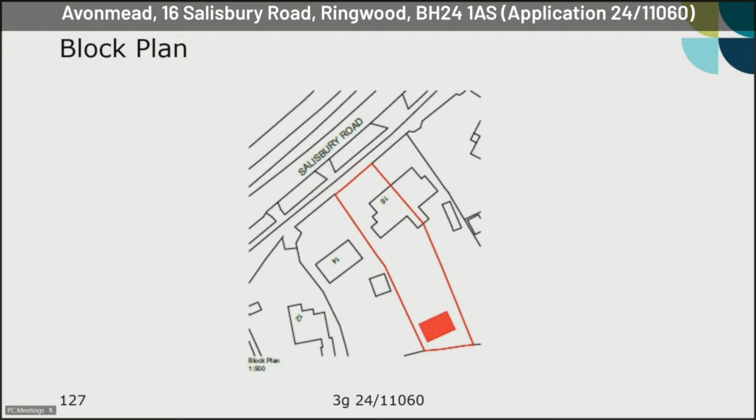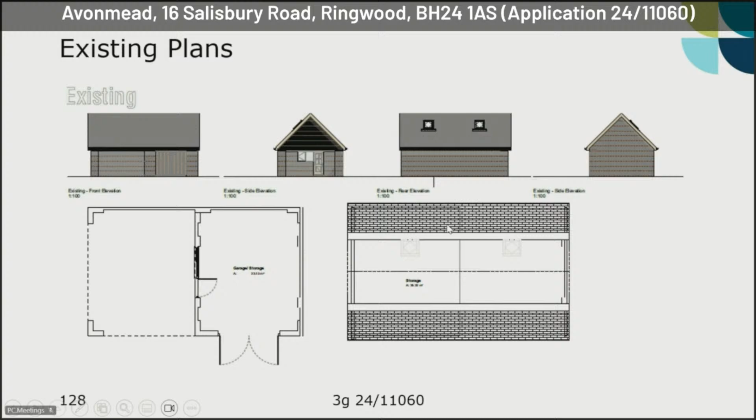The proposal is for an annex for occasional use for a blended family that are mainly at college and living away.